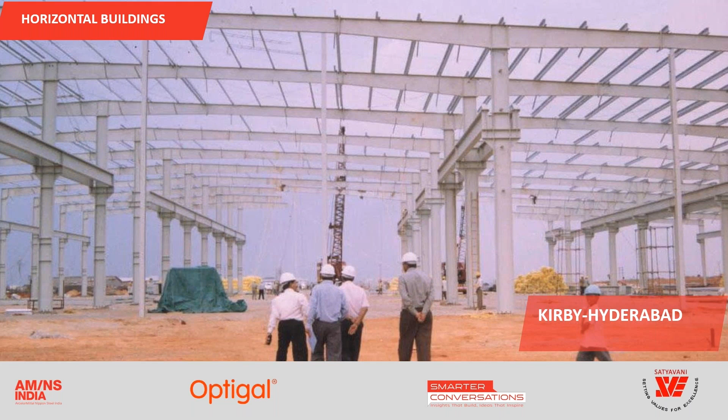I'll be showing some pictures of the projects we have done. This is the first Kirby building we have done from our office - Kirby Building Systems manufacturing plant, completely done in PEB. It's a single ridge project with future extension possibility. This is the structure during erection - at that time the building was about 360 meters long and 100 meters wide, with multiple bays and EOT cranes available. These are the drawings with the EOT in all the bays.

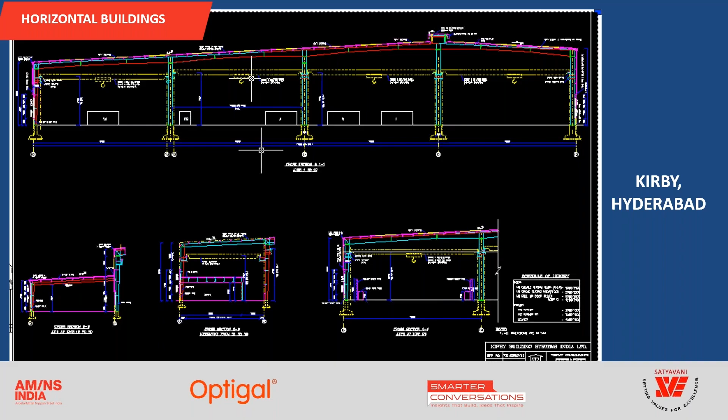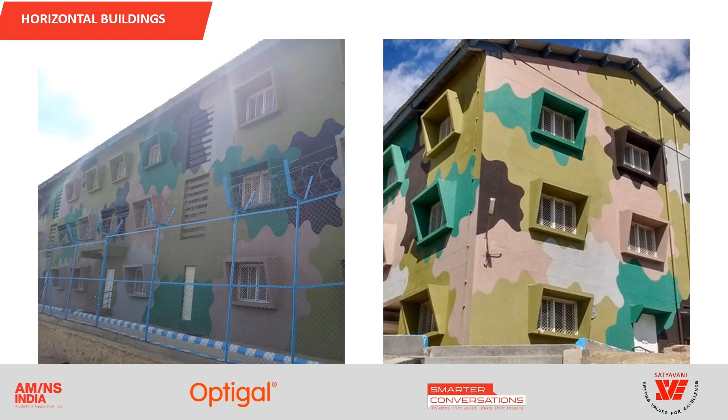Some defense projects also in the Northeast we have done with PEB sheeting because of the snowfall and heavy rainfall in the Northeastern region, associated with wind. We designed these buildings, multiple buildings with pre-engineered building concepts, particularly roof sheeting sloped with the single ridge type of roofing. These are some of the photographs of facilities we have done. I won't go into individual details because I have to cover all the aspects of innovation I briefed in the overview.

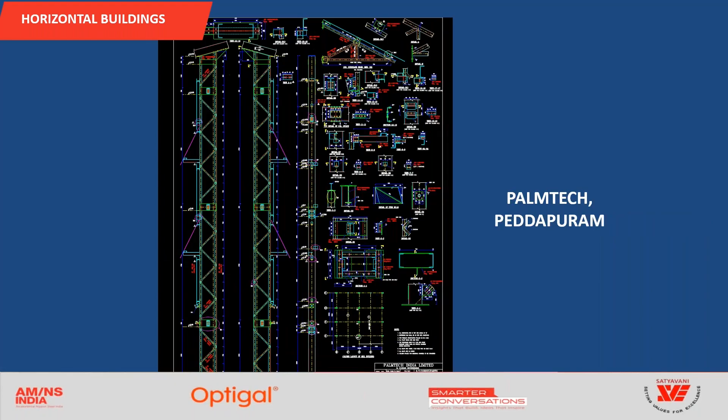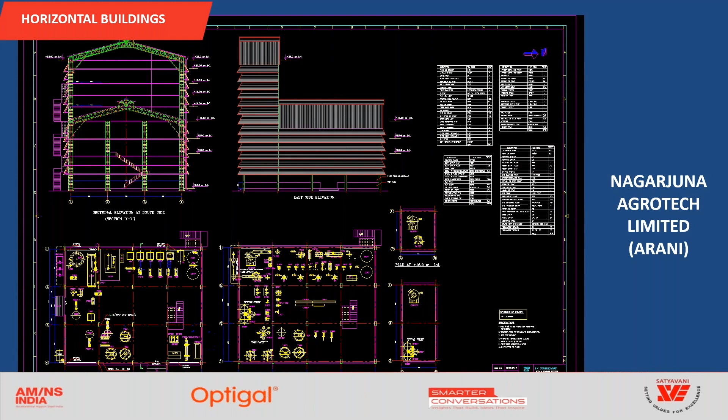These are some process industries where we have used built-up sections and large industrial production areas near Hyderabad, tobacco manufacturing with North Light roof, and edible oil industry refineries also - we have done 2-3 projects using pre-engineered concepts. These are all projects we have done, even power plants, and this is auto cluster development for engineering industries.

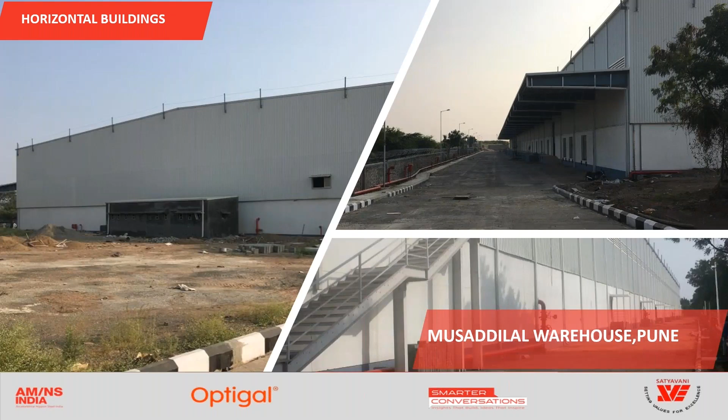This is a canopy you can see for an unloading bay in a logistic park. So for the canopy, we have a cantilever, and you can see the downtake pipe going from the canopy to the wall inside. This is the warehouse basically for ITC, and these are all State Warehousing Corporation facilities with canopies - you can see multiple canopies with unloading bays.

Next is vertical PEB. Now this has been happening for almost the last one and a half decades in India, though in other countries it was there earlier. In vertical PEB, we have multi-story buildings - now we are seeing this in commercial applications also, apart from process buildings. Process buildings require vertical buildings, and some logistic parks also we have done in vertical multi-story concept. Special fabrication requirements will be there for vertical construction - that's why I'm specifically covering vertical PEB.

About 15 years back, if we see in India, we didn't have the capability for vertical building PEB, like fabrication of heated welding with thickness going up to 40mm, 50mm even. Now in India we have many PEB companies who can fabricate these higher thicknesses, and heated welding facilities are available - so India is prepared for vertical buildings. The only challenge is fire protection, for which we now have intumescent paint - earlier we didn't have this. So in vertical buildings, fire protection is another important aspect.

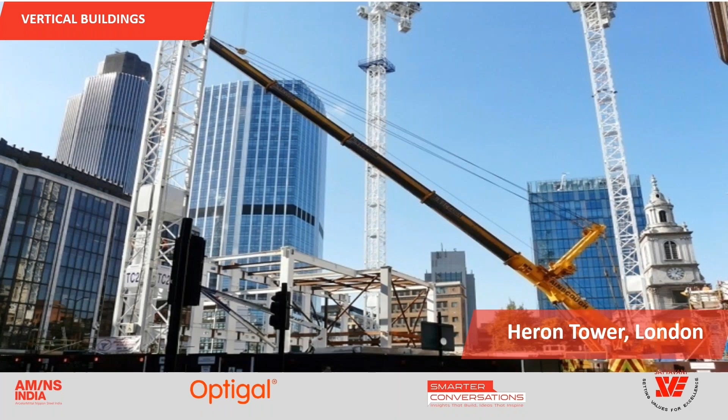This is the first tallest building in London - we all know the Shard Tower. The Shard Tower is almost 300 meters tall using pre-engineering concepts - this I have come to know. After that, we visited some vertical buildings being constructed during 2012-13. We saw that a 1.5 million square feet high-rise building could be constructed in 9 months - 1.5 million square feet in vertical construction with, of course, a central core in concrete.

So this is the concept which can be implemented. Now in India, particularly in Hyderabad, we are seeing many commercial buildings in pre-engineered steel construction, with composite deck, which is available. I'll be covering those aspects also as we move forward.

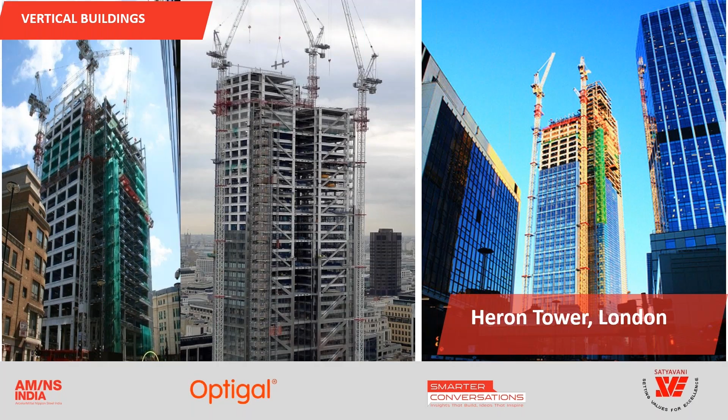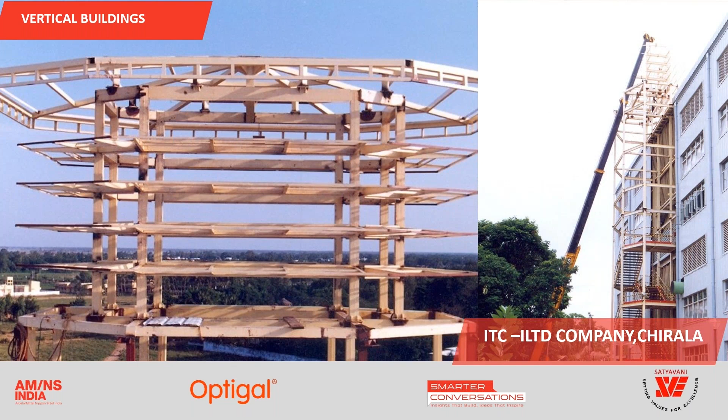This is the building we did about 25 years back for ITC, 20-meter high, a pre-engineered concept building with all the built-up sections, cladding and roof sheeting, and composite deck in between the floor. This is the photograph of the completed building. For ventilation, we provided staircase shafts working as hot air escape shafts, and lighting shafts for the process area with glazing, which added to the aesthetics as well.

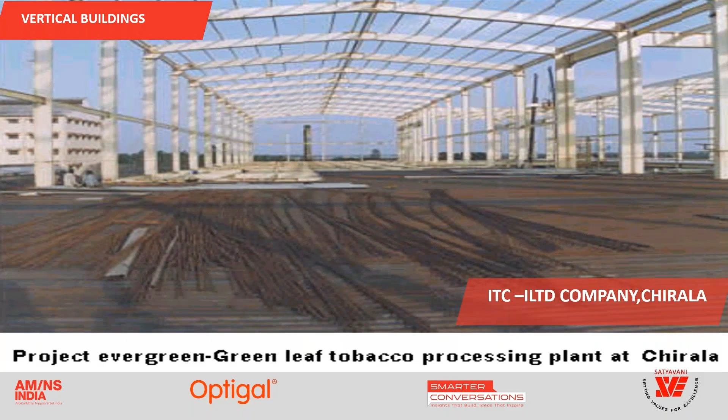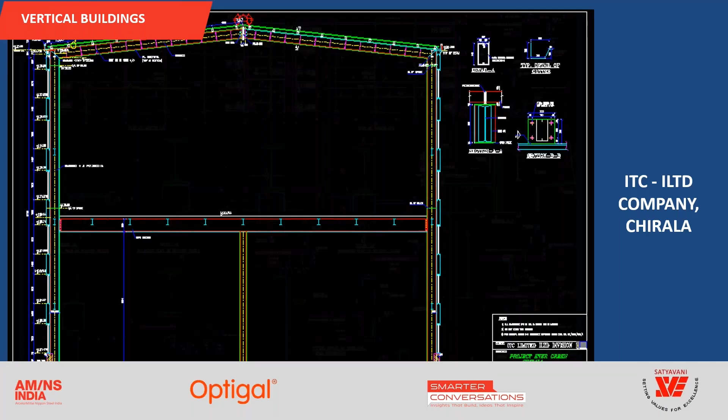These are all moment resisting frames. You can see there are no bracings provided in these buildings—we have designed moment resisting frames. Only in the gable end have we provided some bracings which are required, where it requires a special design for wind application.

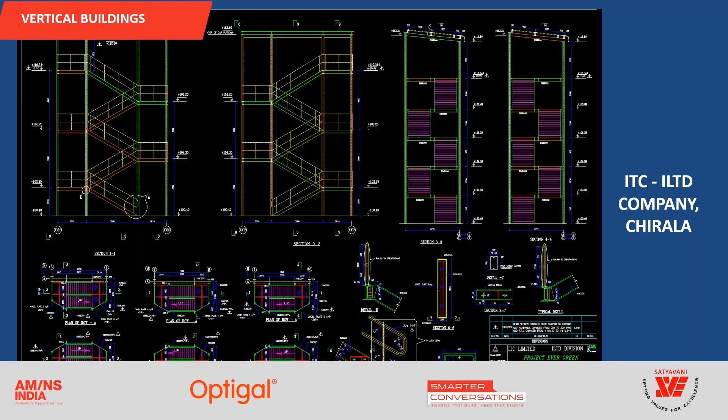This is the floor plan, 106-meter long and 66-meter wide and 20-meter tall building with all the fire escape staircases required from safety requirements. These are all the drawings for gable end, wind resisting frame, and floor deck with the composite deck.

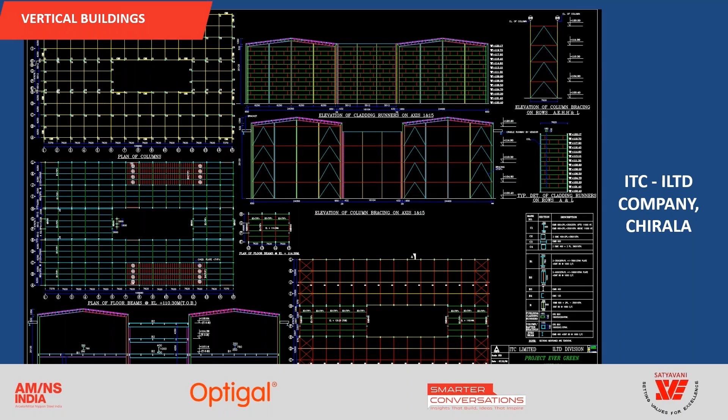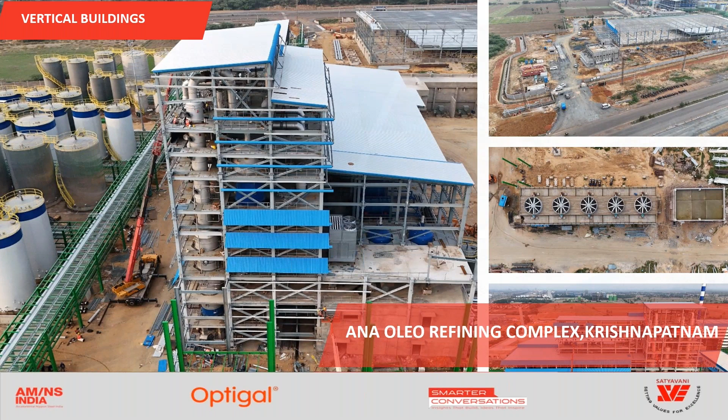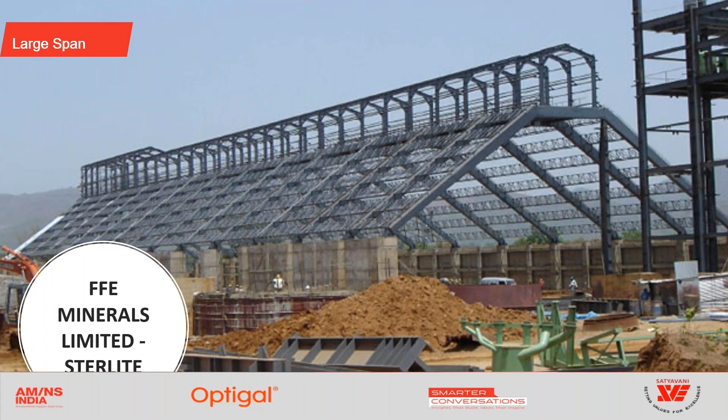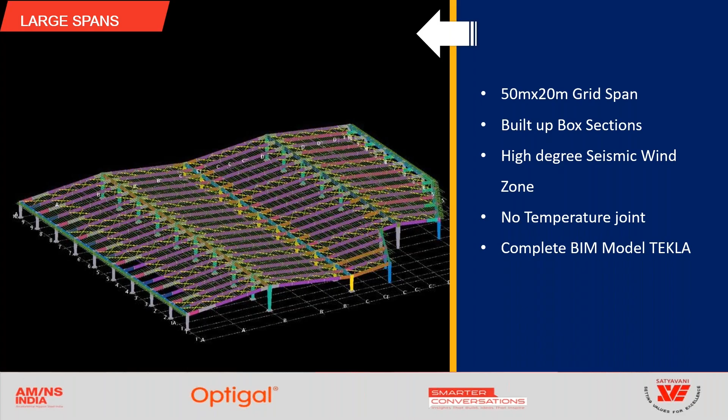For Sterlite, we did a 47-meter span with a fabricated box section and latticed purlin. Here's the drawing, and this is another project where without expansion joint we did about 220 meters, using the box section again, 50-meter span by 20-meter span requirement. Some indoor stadia and auditoriums we have done with spatial structures.

Now coming to the lighting requirements in these pre-engineered buildings. Normally in large scale logistic parks and warehouses, we have done a single warehouse with a footprint of 7 lakh square feet. We know the importance of lighting and ventilation, so we consider different types of lighting possible in PEB—strip lighting, window lighting, north light in smaller buildings, and solar tube ceiling. These are all the lighting methods we adopt in pre-engineered buildings.

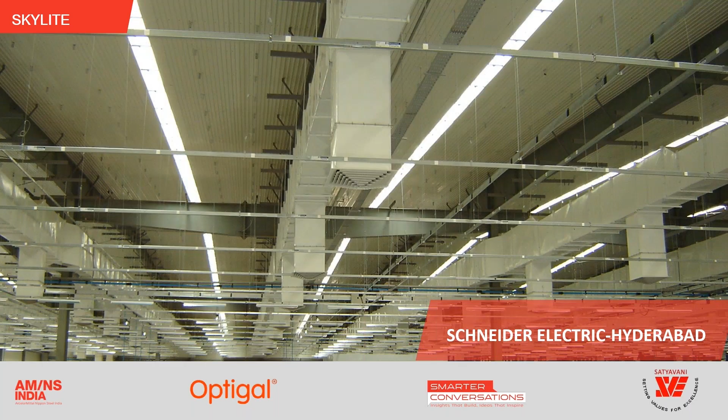This is one electrical assembly plant in Hyderabad. We can see the skylight strip lighting giving very uniform lighting—this is during the day without any artificial light. In fact, this is also controlled air, that is, artificial ventilation. So this is about skylights.

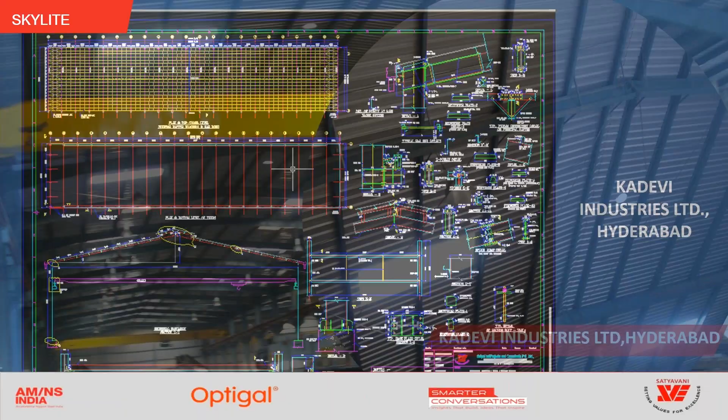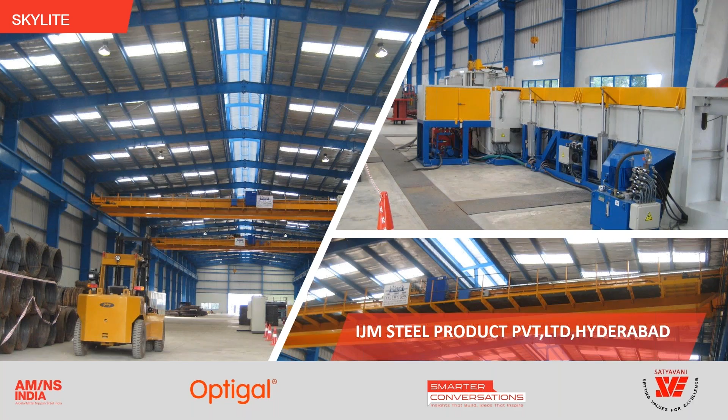Next comes my topic on aesthetics in PEB. Earlier we were constrained with only straight profiles, meaning we used only plain sheets. Now we have multiple shapes of sheets possible—we get readily formed sheets with all the curves required. So form facade elements, shell and dome elements, curved sheets are available, and we are using these pre-engineered structural frames also in the facade elevations.

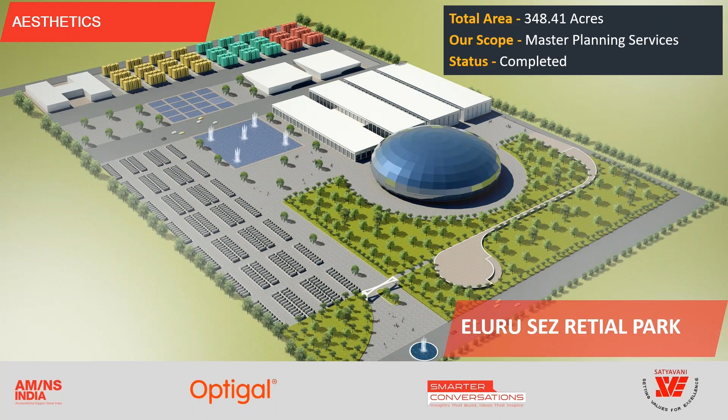Next is innovations in PEB. This is central to my topic today. So roofing, earlier we used to have sheets punctured, and if we don't use neoprene washers, people used to use rubber washers, and there used to be a lot of corrosion and leakages through these punctured sheets. Even lighting, ventilation, north light roofs also used to have a lot of problems with leakages and gutters.

So now we have a lot of developments in roofing with standing seam, seamless roofing without puncturing the sheet, and also without lapping required. Single rolled roof sheeting almost 50 to 60 meters in size, we are using.

Next is access doors, windows and louvers. I'll share those details - access doors, canopies for loading and unloading bays, and precast concrete panels. Earlier we used to have walls in masonry, which used to take a lot of time. Now, thanks to the precast concrete industry, we are getting panels, Acotec panels, lightweight panels we can use for facade elements, and above 3 meters we go for metallic cladding.

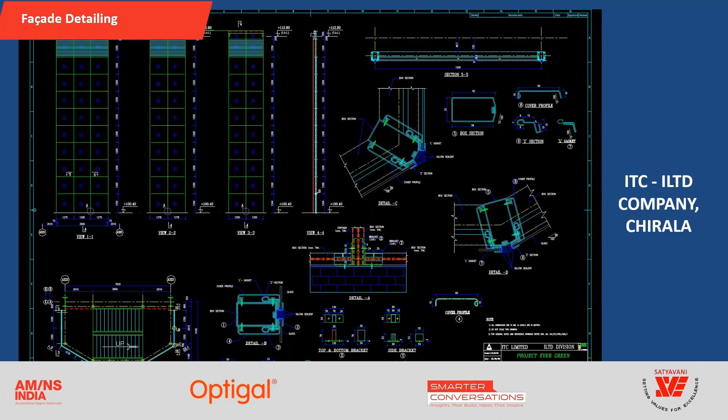Now today we have seen the video presentation before about what Optigal is - it's like optimum galvanized sheets. We have been using galvanized color-coated sheets, but we were facing problems of corrosion in these galvanized sheets, even though color-coated, because we cut the sheets during implementation for site requirements. So even if we cut, it should not corrode. So how we can protect these galvanized sheets is what they have developed as a product.

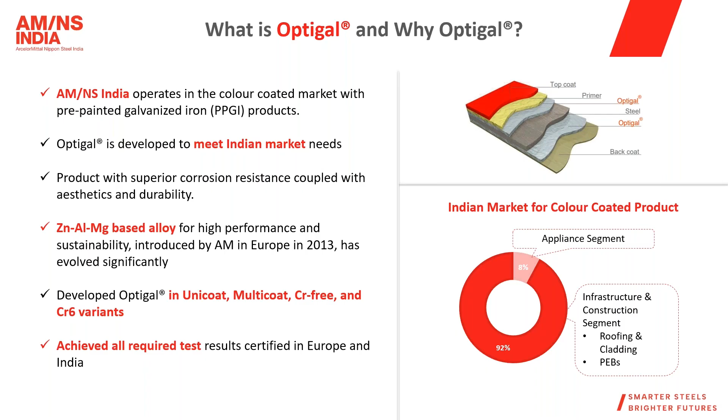It is very useful, as I find it part of my innovation - it's a zinc, aluminum and magnesium based alloy for high performance and sustainability, introduced by ArcelorMittal in Europe. They developed it in 2013, and now in India we have these Optigal sheets available in different variants - unicoat, multi-coat, Cr-free, and Cr6 variants. So it has achieved all the required test results.

So this is the composition of Galvalume, and we can use these sheets against corrosion. In the middle, earlier we used to use only zinc for galvanizing. Now we have zinc and aluminum, zinc-alum sheets. And the next development is this composite with zinc, aluminum and magnesium, which takes care of the corrosion aspect in existing color-coated galvanized sheets.

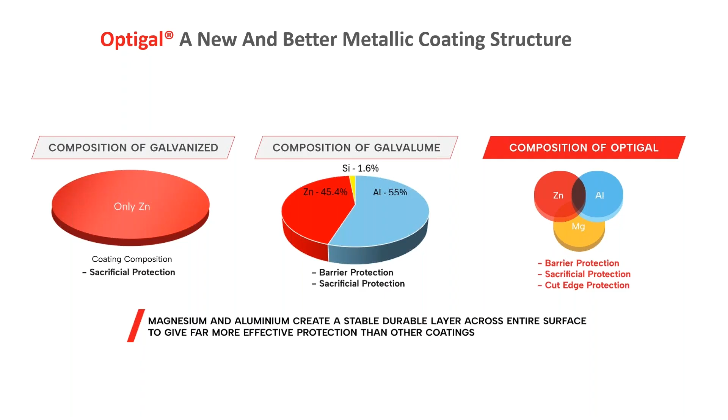So you have these 4 variants in their product, like Optigal with ZM 120 and 55 micron nominal PU, which will give you 25 years of life warranty. So this is very, very required.

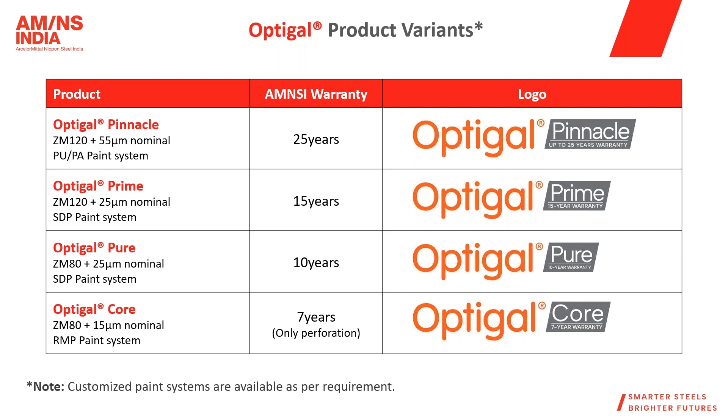In fact, I'm sure most of us engineers have been asked by end users, what is the life of my structure? So when we talk about life of structure, we have to talk about life of every component with the required maintenance. Depending on the life required for a temporary structure, we can go for Optigal Core with 15 micron nominal and ZM80, and Optigal Pure gives 10 years life, and prime gives 15 years life. Depending on the actual life expected, we can go for these products of Optigal.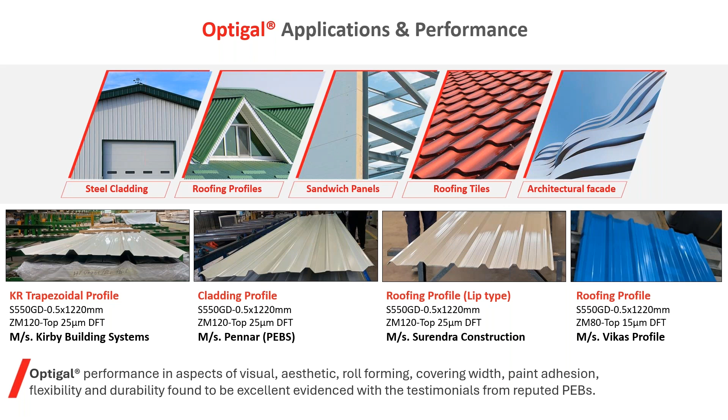So this is the background of this, because this is corrosion resistant Optigal. With this, we can plan roofing with standing seam and solar panel clipping. We know Tata BlueScope has come up with a profile where you can clip solar panels onto the roof. And we have this curved profile like Proflex, and we have domes that can be done now with this sheeting, and retractable roofs, which is a requirement nowadays particularly in sports.

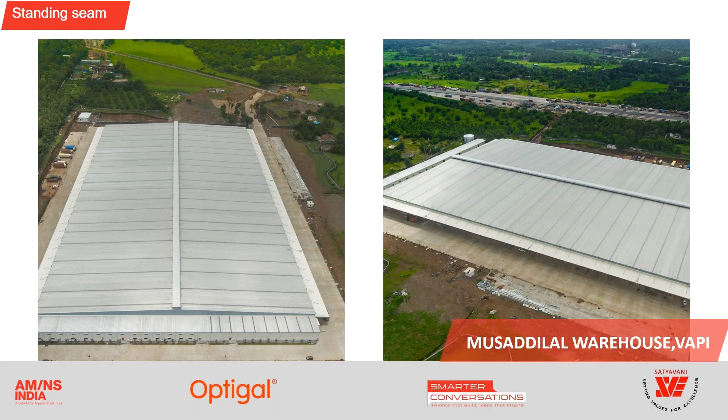Next is sustainable PEB. People talk about overall carbon emission or carbon footprint in steel, but if you see the apple-to-apple comparison for the same building done in conventional concrete and masonry, we definitely have reduced consumption of material, reusable material used, and more recycled content in this material. We have solar roofs where we can provide renewable energy and natural draft ventilation. We don't have to use any power with these ridge ventilation systems or radial exhausts that we provide, and natural light with skylights and solar tubes. So PEB will be more sustainable compared to concrete construction methods for large areas, like 5 lakh or 6 lakh square feet of horizontal spread.

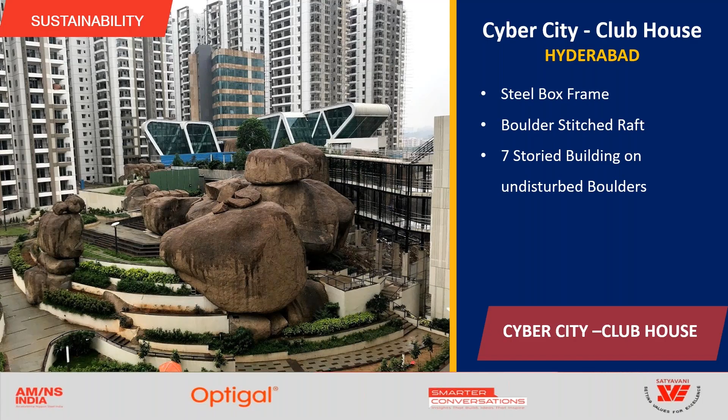You can see these concept views. We have numbered each boulder and enumerated the masses, and we stitched these boulders together. The boulders themselves act as the foundation, so there is no need for large concrete footings.

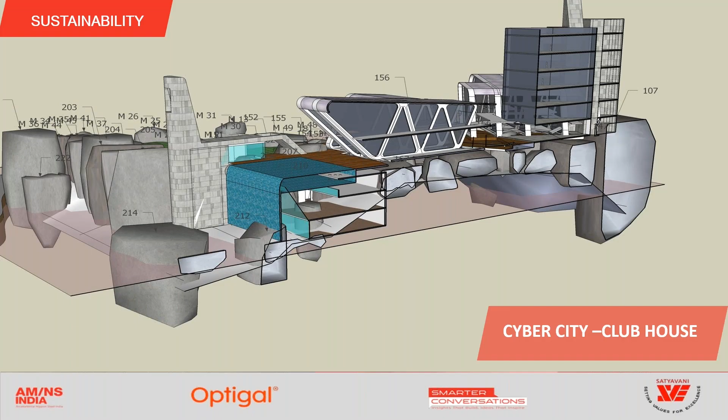So this is the project we completed with all sustainable concepts. The architect wanted the boulders to be seen from the flooring, so they have given a glass floor on the steel structure, and we have retained all the boulders in their natural state. This was before commencement of construction. We have utilized the boulders, and this is during construction.

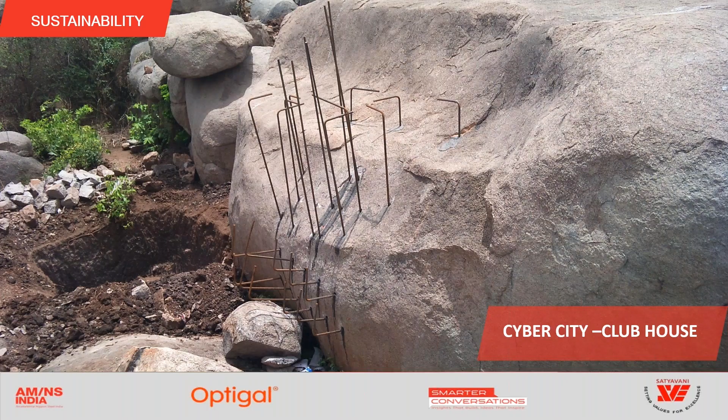So we anchored to the rock and stitched the boulders, making them connected as the raft itself. This is the conceptual view, and you have seen the real photograph after completion. It is completed.

Next is timely completion of projects with PEB. I myself could do 2 projects: one within 60 days, an auditorium from groundbreaking to conducting the conference, and another in 30 days using PEB. We can do complete pre-engineering, including flooring, toilets, everything in the project without any civil component except for the foundation. So rapid execution, assured quality and ease in construction with PEB. We can do total pre-engineering in completely knocked down condition.

Nowadays we are seeing buildings where people are selling houses for 5 lakh rupees. So it is possible. I'll show some of the things we have done even 30 years back. Modular PEB, we have seen in Mohali, completed a 10-storied building in 48 hours with this modular PEB concept. And this is the VVIP gallery in the racecourse in Hyderabad, which we did about 2 years back in 30 days from groundbreaking to occupying the gallery.

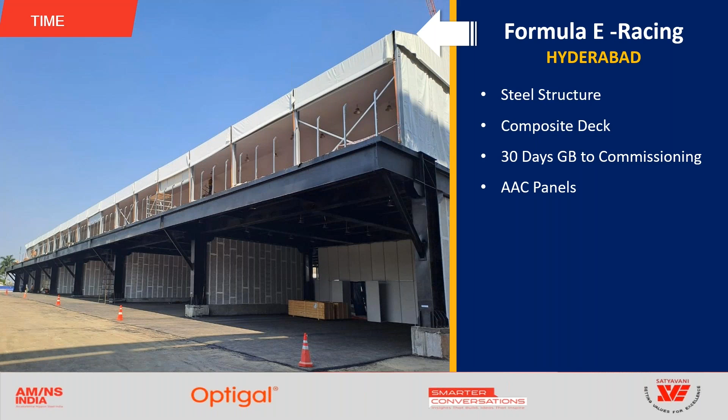This is a steel structure completely designed, including the design time, completed in 30 days. And this is an auditorium we did again in Hyderabad in 60 days, using complete pre-engineering including the flooring. Those days we used Aerocon panels for the flooring with the pre-engineered steel structure.

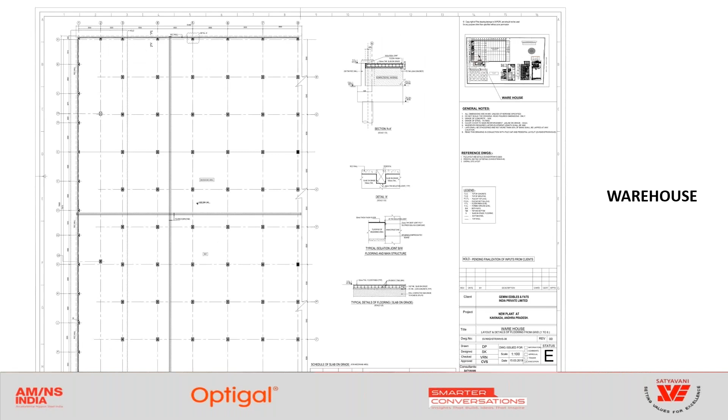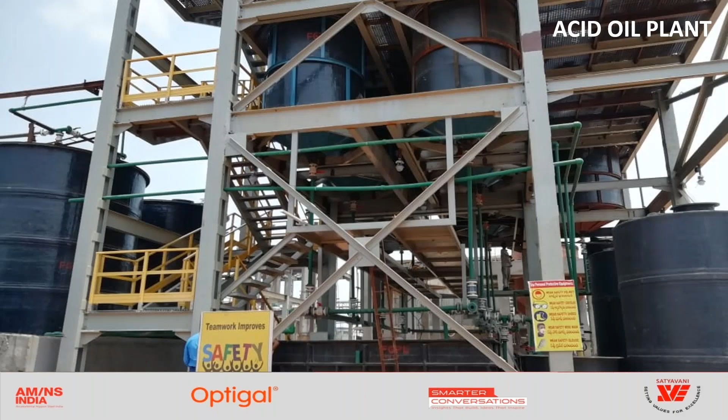This is an edible oil factory we did in 12 months' time, and this is an acid oil factory and many other industries. We have done timely completion without any delays in projects - 9 months we completed, 12 months we completed. Whatever time is given, it is easy to plan and execute and control the timelines with production because it's a controlled production in pre-engineering. So these are all the projects we have completed on time.

Next, most important for all our engineers, is the design of pre-engineered buildings. The major decision we have to take is whether we go for hinged base or fixed base, and whether we go for moment resisting frames or braced frames. This is a very important decision considering the type of soil, spans required, and functional requirements. Sometimes we will not be allowed to use bracings because of the movement of vehicles within the building, so we have to decide.

Next is the composite deck in mezzanine floors and multi-story PEBs. We use this composite deck, and the lattice deck is a further advancement, where the reinforcement used in the concrete itself acts as a lattice for supporting the deck sheet. This way we can increase the span capability of the deck sheet from 2 meters to 6 meters.

Foundations, plinth and roof slope are also important. When we go for lapped sheeting joints, we need a 1:10 slope, and with standing seam we can go up to 1:20, reducing the load of gable end height. Suppose we have a building 100 meters wide with a ridge at the middle, 50 meters. A 1:10 slope gives a 5 meter ridge height, and 1:20 gives a 2.5 meter ridge height. So we have to take a calculated decision, considering the cost difference between seamless roof, standing seam roof, and jointed roof, but overall cost must be considered.

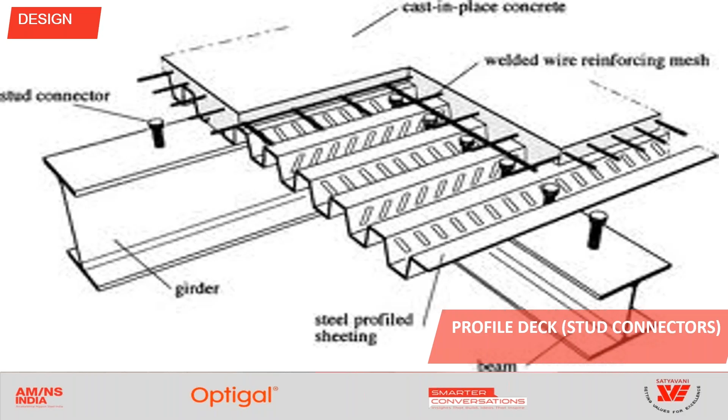These are the braced frames, and this is the deck sheet, the composite deck slab - not very new, we've been using it for 25 years, but the improvement is this lattice deck, which we are using of late. The reinforcement that goes into the concrete above the deck sheet is used as a supporting lattice for the deck sheet, increasing its span. So at the design stage itself we have to consider these aspects to fix the slab thickness. And this is a design canopy we have done using lattice.

Next is wind in PEB - it's a very primary load. We all know pre-engineered building design is governed by wind, whether it's roofing, cladding, or gable end, and we also have to decide about moment resisting frames or braced frames depending on the wind effects on the structure. And storage in PEB - most PEBs will be used for storage.

We have rack-supported PEB structures. We have stack-supported silos and automatic storage and retrieval systems, which is being widely used by Amazon now.

This is a storage warehouse we have done, 5 lakh square feet, and these are the storage racks. The floor load sometimes can go up to 10 tons per square meter depending on the storage requirements.

When we design one building as a stack-supported building, this is a normal seed storage building. Next is the flooring in PEB.

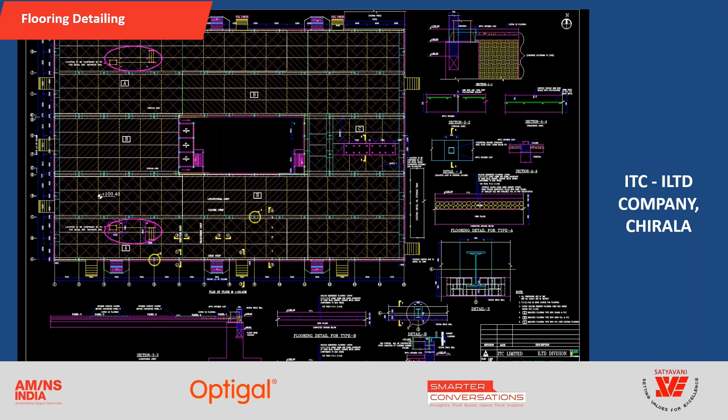About 25-27 years back, we did flooring with vacuum dewatering, with so much detailing of the joints, whether construction joints, transverse joints, or expansion joints. We developed these flooring details, but now it is much simpler with seamless flooring.

Next is stormwater in PEBs. We all know we have single large buildings of 5 lakh square feet, equivalent to 10 acres and odd. How do we plan the water drainage? Using gutters, downtakes, and floor drains. We have predetermined, pre-designed gutters available.

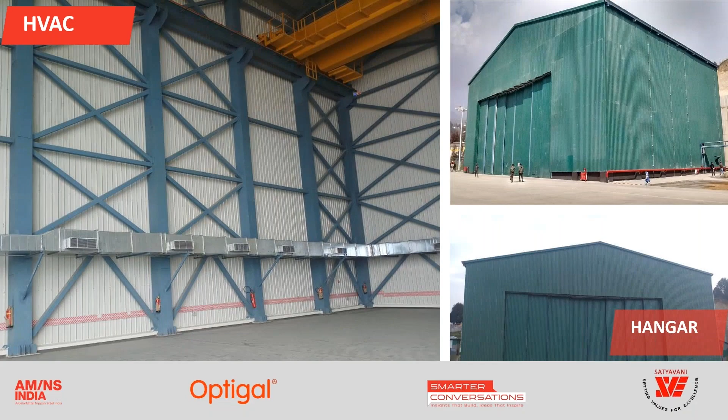Next is heating, ventilation, and air conditioning: roof monitors, radial exhausts, louvers, heating and cooling. We did a project where we had heating from minus 20 degrees to plus 20 degrees. This is the heating system, you can see the ducts we provided, and louvers we design into the building.

Next is material handling in PEB: EOTs and monorails, conveyors, pipe conveyors, and ASRS systems. This is the EOT you can see in the same building.

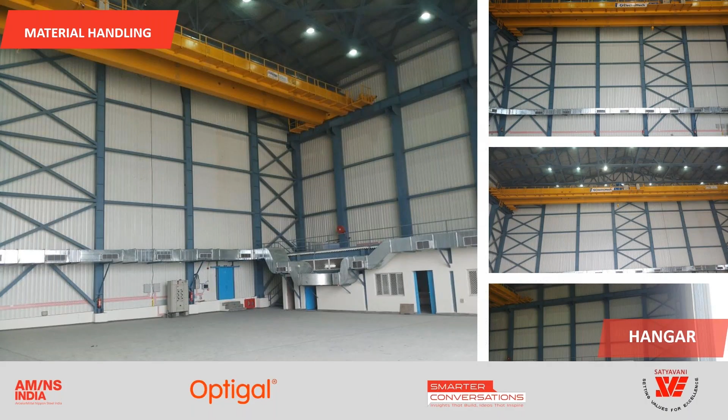Material handling in Amazon we designed, and this is the ASRS system we did almost 30 years back for ITC, where we supported the roof with stacks itself. The challenge was that ASRS requires 5 mm tolerance in verticality, so for wind design in the coastal region near Kakinada, we had to design the stack-supported system with 5 mm maximum sway, for a wind speed of 50 meters per second.

These are the drawings of material handling systems: conveyor galleries, rack supported systems, and this is a hanging conveyor on the floor that we have designed.

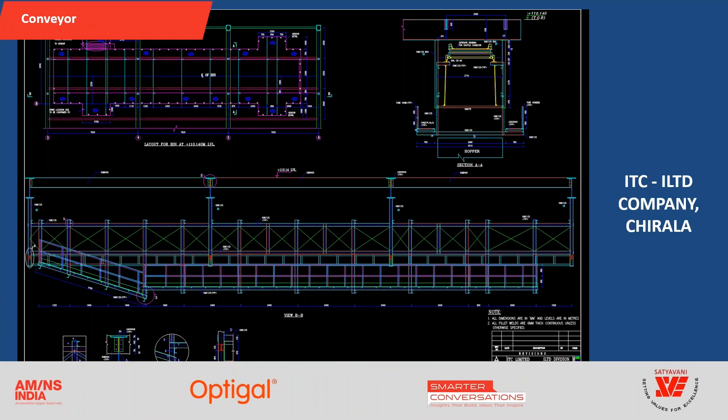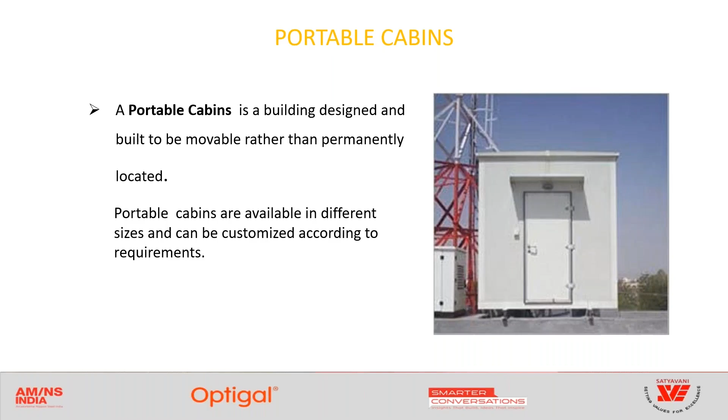And roll-up doors, sliding doors, rapid sectional doors - these are all required in some of the logistic parks, along with boom barriers and rapid bollards. This is the staircase drawings and portable cabins that I mentioned we have been using for the last 30 years.

So that's all I wanted to cover today. If you have any questions, I request the organizers to coordinate picking up the questions from the chat box.